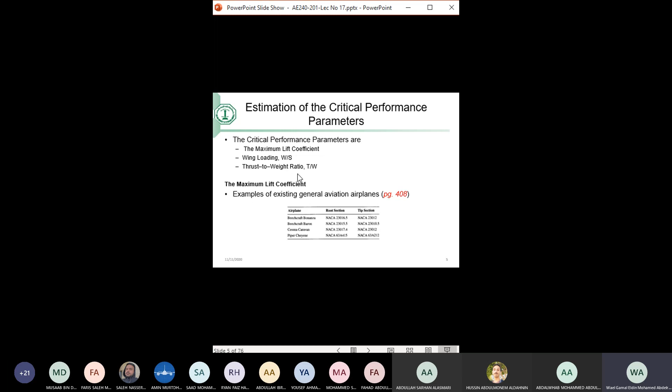So decisions are an important part of the design process. It's not like problem solving. It's not like you are given the problem and you expect to find everything. You will have to do some research, competitor analysis, you might call it. What are the other guys doing? In here, you will have to make choices that you can justify.

So it's important when you make a decision like this in your design project. For example, you will probably not be using these two. Maybe you will use the same airfoil for the tip and the root, because you don't need much fuel in an aerobatic aircraft, and maybe because you want to manufacture the wing easily. So it would be wise to have the same airfoil because it would be easier in manufacture.

So regardless of your choice, almost all reasonable choices will make the airplane fly, but the designs are going to be better or worse if they are justifiable, if they have good reason. Okay, that's a very important point. So in the example that we're having, these are the two airfoils. Before we start calculating CL for this, I will stop to see if you have any question in the rationale of picking the airfoil section up to this point.

Okay. So if I look at these two airfoils, I realize that these are the CL alpha curve and this is the CM alpha. We don't care about the CM right now. Let's focus on the CL alpha. This airfoil at the root has a maximum CL of 1.8, this airfoil at the tip has a maximum CL of 1.6. But in my equation, I have only one maximum CL. So it would be only reasonable if I choose the average between the two values, and that would be my CL max of the airfoil.

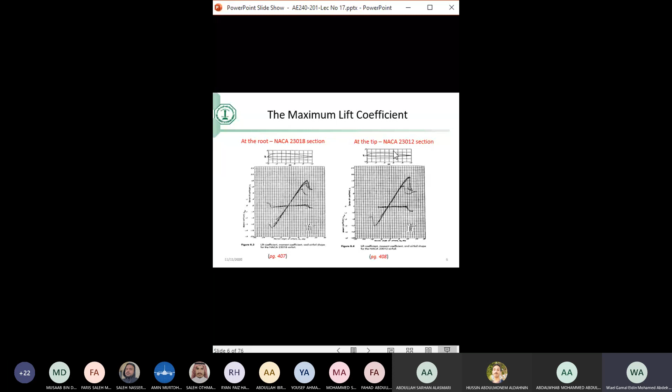So we assumed an airfoil type, which is okay, as justified by other aircraft. We took an average, which is a reasonable way to do this. We assumed an increase in CL max of 0.9 because of a plain flap, which we have evidence that shows us that it is 0.9. I'm talking about the guidelines you are asking for. We add them. I am reducing CL max of the airfoil by about 10% to account for the 3D effect. We have something in our hand that justifies this until I get the final answer. Does this answer your question?

Yes. Okay. And we will do this over and over. You will do this in your team, and we will continue to do this starting from this point forward, because we are not solving a problem, we are designing something that's not there. Okay. So we answered the first question, what's CL max? Then comes the second question. What would be the wing loading?

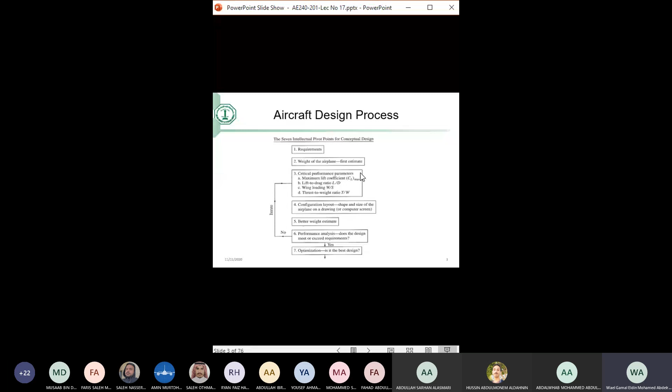So I need to go back and look at my requirements. What drives the wing loading? And I will go one by one. What are the requirements? Is the maximum level speed affected by the wing loading? So I have to go back and check my maximum level speed equation. Does it have W over S? And I will find it has W over S, but it will also have T over W in there. But since I don't know the thrust, that's not going to be a good choice.

If I go to the range equation, the Breguet equation, do we have wing loading in there? Do we have W over S in the range equation? Anyone? Do you remember the range equation? R equal? Victor? The range. Yes, you said we have something in the range. Do we have wing loading? The objective is the wing loading. W over S. Do we have W over S in the range? I think, yes, I'm pretty sure. No, we don't.

The range equation has the specific fuel consumption, because any equation will have the parameters that affect that performance. What affects the range? Specific fuel consumption, of course. C, the speed, V, L over D, how aerodynamically clean the aircraft is. So L over D is there because this affects the range. And how much fuel you can carry, W over W. But the wing area is not there. It's not in the range equation.

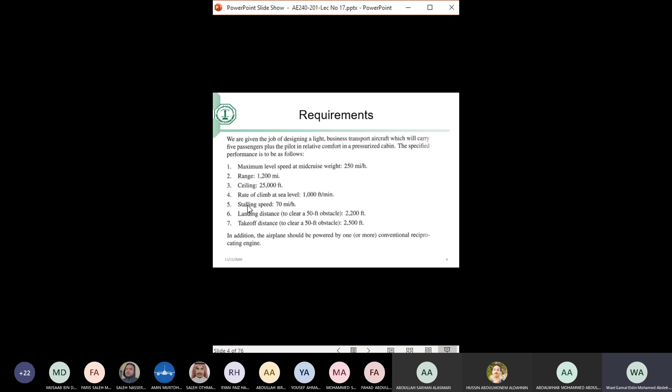The same goes for the landing distance. If you look at the equations of landing distance, you will not see thrust. You will see only W over S, in addition to other small parameters, K, CD naught, and so on. So my point is we will determine the wing loading from the stalling speed and the landing distance for this aircraft.

So I will start by calculating the wing loading that's necessary to satisfy the stall velocity requirement. The problem says the stall velocity is 70 miles per hour. 70 miles per hour means 102 feet per second. So I will go back in chapter 5 of my textbook and find the equation of the stall speed. Actually, I don't have to do that. It's a very simple equation to derive, right? Lift is equal to the weight equal 1/2 rho V squared S CL max, and substitute with whatever values you have. So we have the stall speed in here.

We have CL max. We have just found CL max to be 2.34. Stalling typically is required to occur at sea level when the aircraft is landing. So I will put sea level density. So the only unknown in the stall speed equation after moving everything to the other side is the wing loading. You will realize that the design equations of chapter 8 are exactly the same as the performance equations of chapter 5, except that we move everything to the other side and keep only one parameter.

Just like what you did in the quiz. In your quiz, I asked you to determine the wing area or the thrust. One section was the wing area, the other was the thrust. So you move everything to the other side and determine maybe the wing area or the thrust.

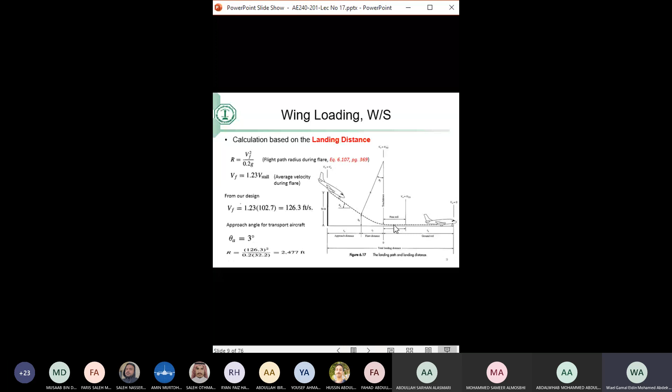Yes, Doctor. When we say that the aircraft will land on grass, what will change in this equation? Okay. If the aircraft lands on grass, what do you think? Do you think the first part will be affected? No, not the first and not the second, and not this one because it's rolling. It's that one. So the coefficient of friction will probably not be 0.4. Probably it will be slightly less, maybe.

So we can assume 0.35, 0.36, maybe, and we will use that. So that will be the effect that we have on the grass. It will have some effect, but it will not be a major effect. I know you are referring to your design project. Why is grass there? It will come in the design of the landing gear.

Landing gears pushing on the soil cannot push with a certain pressure if the soil is soft. So when we come to the design of the landing gear of this aircraft, we will deal with the grass. It will have more effect there. It has some effect here, but the major effects of the runway type will be on the landing gear. So we will have to pick a slightly larger landing gear than if the aircraft was landing on regular paved runways. Okay, does this answer your question?

Yes. But what about the parameter N? N is the number of seconds for which the aircraft... Well, it will, but think of it this way. In this aircraft, we are designing an aircraft that will carry 5 passengers and 1 pilot, so 6 people. How many of these aircraft have you seen landing on grass? It's not a requirement in this design. It's a requirement in your aircraft, I think, right? Yes. Because it was an aerobatic aircraft. So not in the one that we are dealing with right now, but in your design project.

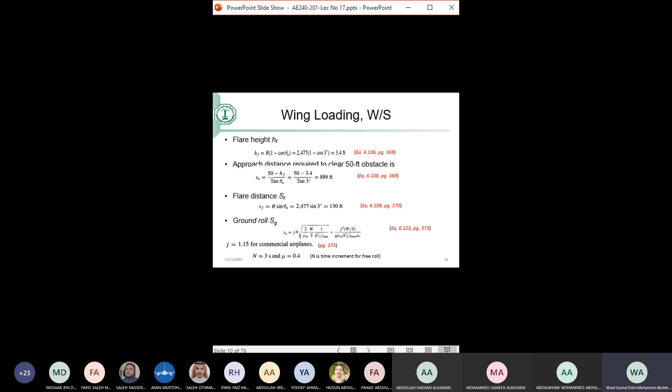Okay, now comes the tough question, and we are going to conclude with this question. I have wing loading here 41.5. That means the wing area is W over 41. But in the stall, we have another wing loading, 29. That means the wing area is W over 29. Obviously, I cannot have two values of wing loading, otherwise I will have two wings, one that's suitable for the stall and one that's suitable for the landing. The question is, I have to pick one, or should I take the average?

What should I do? I have two values of the wing loading, and at the end of the day, I have to pick one. Should I pick one of them? Should I take the average or what? Can I change the requirement? Maybe I can change the requirement.

Can you? If I tell you, design me a house that has 3 rooms, and you tell me, well, I have trouble, I'll make it only 2. We don't mess with the requirements. Because if you change the requirements, you will not get the design done the proper way. I can do whatever I want and then say I changed the requirements. Nope, you cannot change the requirements.

Any other question? Depends on the calculation, right? Depending on what? If they're both reasonable, we take the average. If one of them is negative or really small, we take the other one. Okay. We take the other one, you mean the higher? The more reasonable one. What is reasonable? What's more reasonable out of the 41 and 29? Which one is more reasonable? 41 or 29?

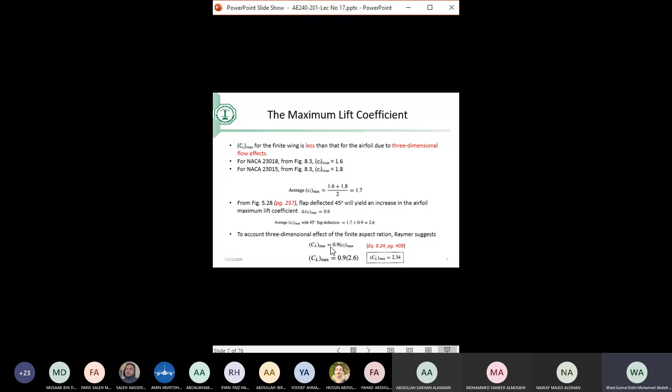The stall requirement of 29 means if you want a wing that will give you this stall speed, this wing has to have a wing loading equal to 29 or less, because the more wing area, the lower the wing loading. You see the wing loading here? The 41 will give me a wing area of W over 41, but the other one will give me a wing area of W over 29. Which one will have the biggest wing? The one coming from the 29 or the 41? From the 29.

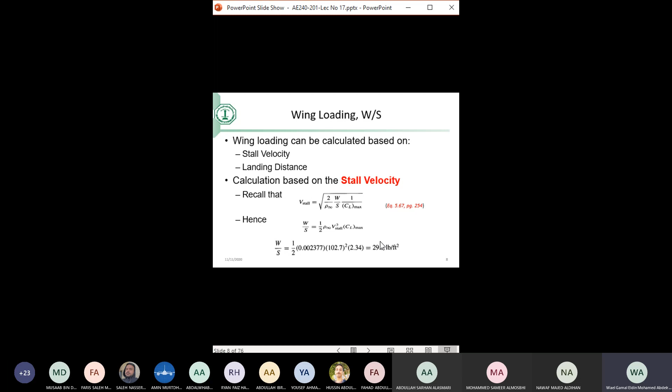It is the one that's more safe. It's the one that's reasonable, if you want to say it. It's the 80 kilograms in my case. So if we have several values of wing loading, we always pick the lowest value because it means the biggest wing. Not because it's reasonable, not because it's average, because it is the value that will satisfy both. This 29 will give me this stall velocity and will give me a landing distance of 2200 or less. Is this clear?

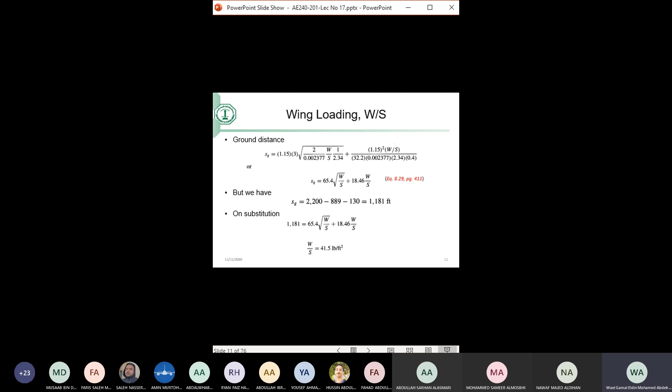But if you pick the 41, yes, you will satisfy the landing distance of 2200, but the stall speed will not be what we had before. You will violate that requirement. So we never take the average, we take the lowest one. The lowest is 29.3. We will use it, and it will give me the wing area from W. We calculated W last time. So the wing area of this aircraft is 176 square feet. It will satisfy both the landing and the stall requirements. Is this clear?

Next time, inshallah, we're going to use the remaining requirements, maybe climb, maybe ceiling, to determine the thrust-to-weight ratio and hence the thrust of the engine. And then we will start to put the engine inside the fuselage and so on.

Yes, there was a question. Question? Okay.